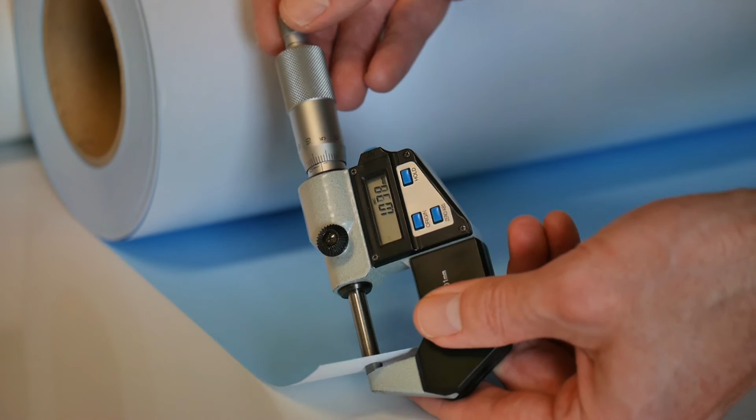Although roll-to-roll printers are only dealing with roll media, the media thicknesses can easily vary from 100 micron up to 1 millimeter. In reality, you would be working one day with a 140 micron poster paper, but the day after with a 400 plus micron thick PVC banner. Now, that doesn't seem like a real challenge, except that the head height can't compensate for different thicknesses, because we're having these fixed head positions.

This means that the gap between the printhead and the media can vary. In inkjet terms, we also speak about the drop-throw distance. It is the distance a drop travels from the point where it's leaving the printhead nozzle until it hits the surface of the media. For a 100 micron poster paper, this distance will be longer than for a 500 micron banner, because the gap is 400 micron bigger.

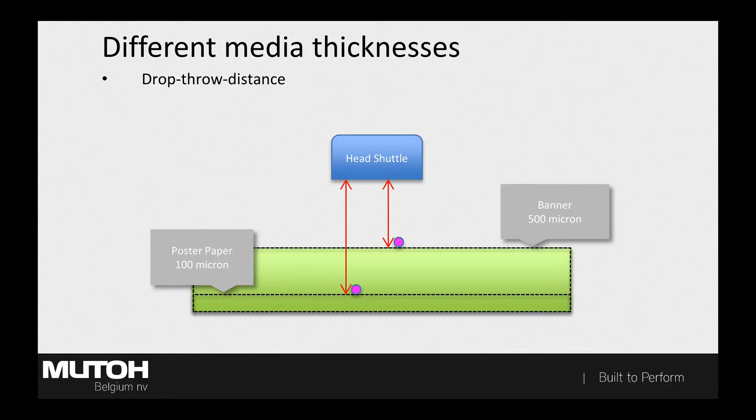This is not just inherent to Mutoh printers, it is true for every roll-to-roll system. In practice, this means that only media sharing more or less the same thickness with the reference media will deliver decent output quality. But let's see what happens when we print on thinner media. The drop-throw distance becomes longer, and the traveling time of the drop becomes longer with it, causing the unidirectional target to shift a little to the left.

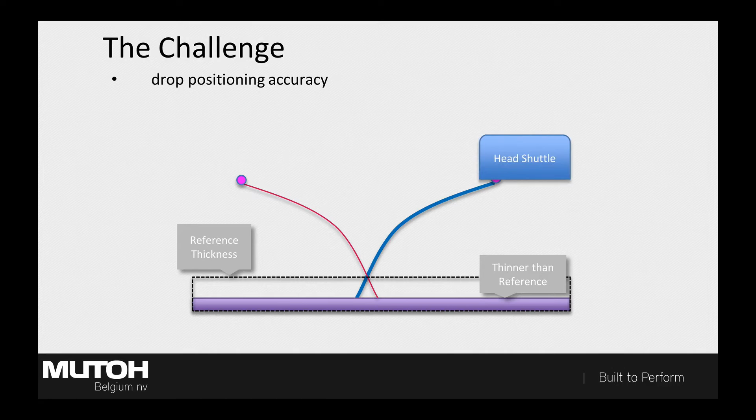The same would be true for the bidirectional timing. The drop would miss its target, but now in the other direction, shifting the drops a little to the right, causing both drops that are supposed to be on top of each other to now be separated. Details like small characters or line work will become blurry, and smooth solid colors turn grainy and coarse.

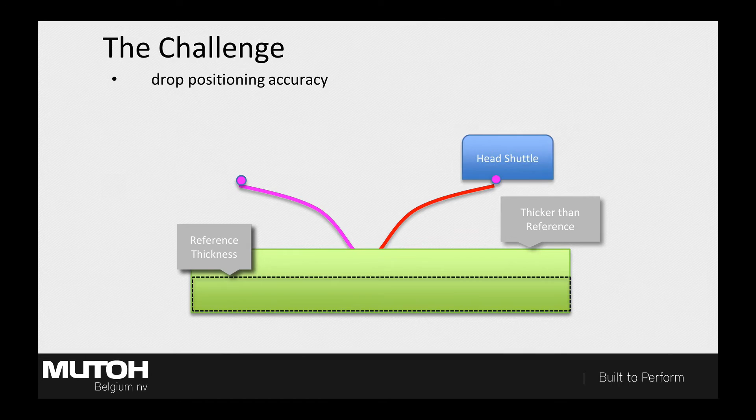A similar error would happen when you print on thicker media. In this case, the drop-throw distance becomes shorter and the traveling time of the drop gets shorter with it, causing the unidirectional target to shift a little to the right because the drops hit the media earlier. The same goes for the bidirectional timing. The drop lands earlier on the media, and just like with the thinner media, the uni and bidirectional drops are positioned apart. Also in this case, we will be facing a loss of detail and image smoothness.

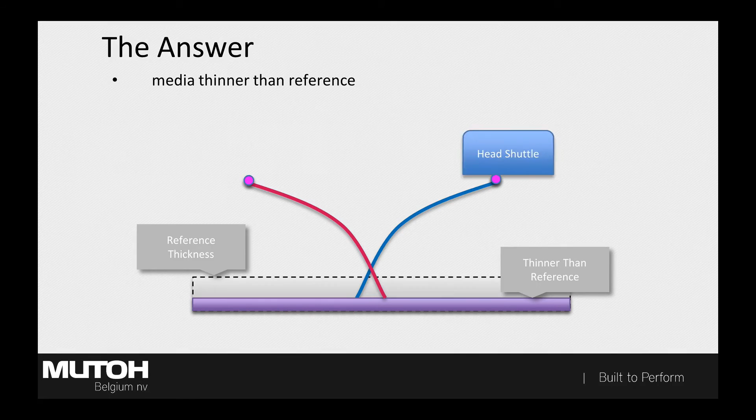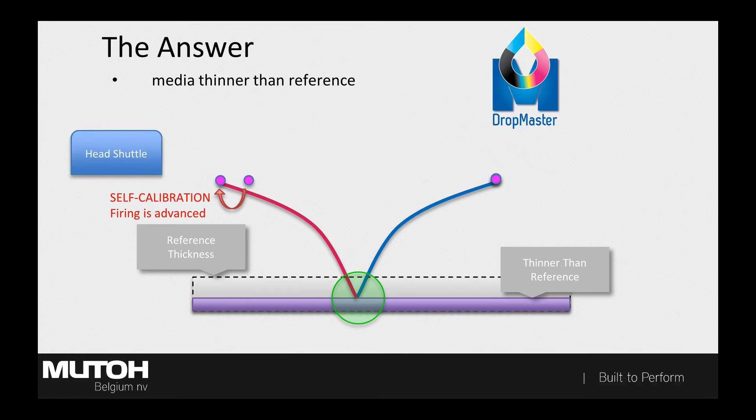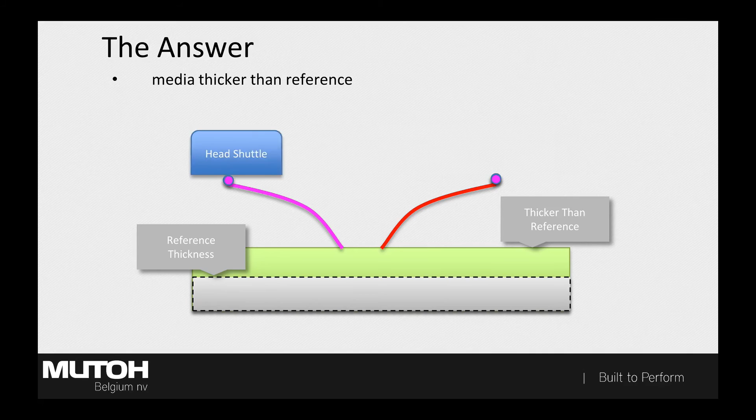This is what happens. When the unidirectional drop shifts to the right, the ValueJet 1638X knows precisely where that drop will fall. How so? Because we know what the characteristic curve of each individual drop, regardless of its size, looks like. With that knowledge, the bidirectional timing can be recalculated to meet the new target, and it does this on the fly. There is no need to print a test pattern or to measure anything. It's an all self-calibrating system.

The only two conditions to make DropMaster successful are to embed the thickness value into your media profiles and make sure the printhead is within focusing distance of the media by selecting the appropriate head height. Both the RIP and the printer will take it from there. Very easy.

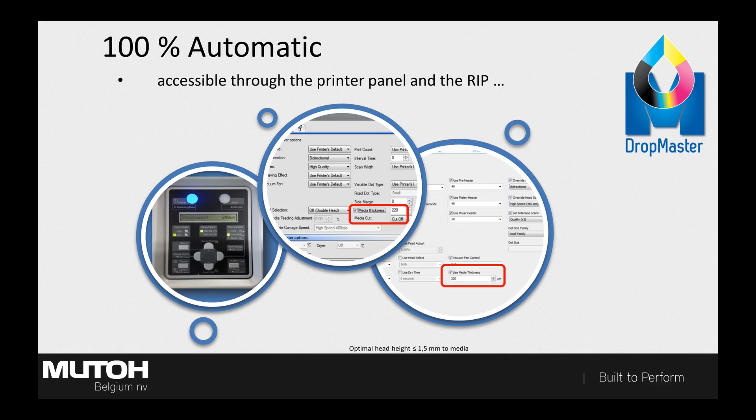DropMaster technology will bring you an unprecedented level of print comfort. The technology has been introduced together with the high-end ValueJet 1638X and ValueJet 2638. But over time, it will become part of every ValueJet of the current generation. As a matter of fact, our smallest and most recent model, the 628, is already using it.